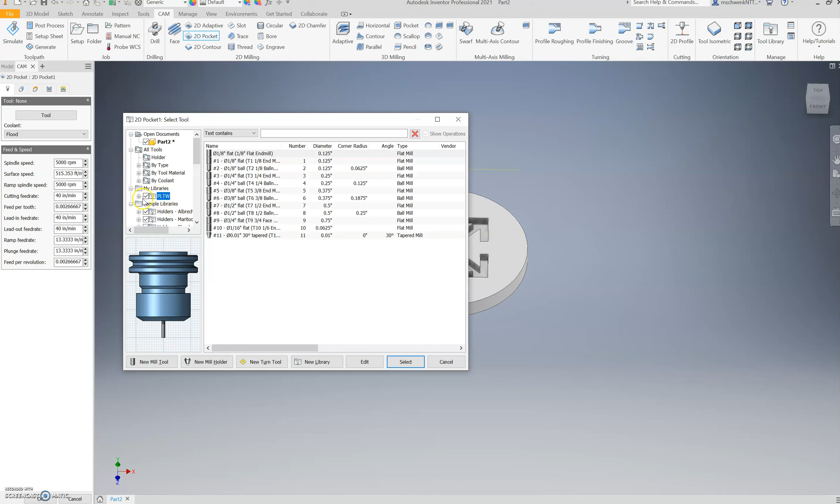So for this operation, I am going to come up to my 2D milling tab, and I'm going to select 2D pocket. And when I come through here, I get some settings where I have to input some stuff so that the machine knows what type of bit I'm using and the values I want to cut at. So I'm going to hit the tool button, and you should have a PLTW My Library, and for this one I'm going to use an 1/8 inch flat mill.

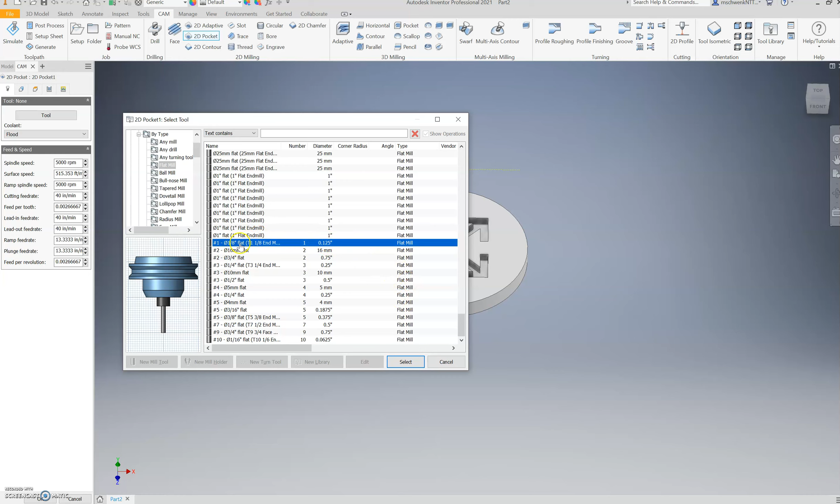If you do not have this PLTW library, you can find this by going to All Tools, and you can go by type. If you expand that, you can go with a flat mill, and then you can search it by diameter. So for an 1/8 inch, just look for one that's 0.125 inches, and you should have an 1/8 inch flat end mill. So I'm going to select that.

Now I have to set up the feeds and speeds. So this is going to be how fast the tool travels while it's cutting. And there's two values that I really want to change here. Based on the size of the bit, these values will change. You can get those from your teacher. For this one, I want to change my cutting feed rate. That's how fast the bit will be traveling through my material. For an 1/8 inch bit, I'm going to change this one to 60 inches a minute.

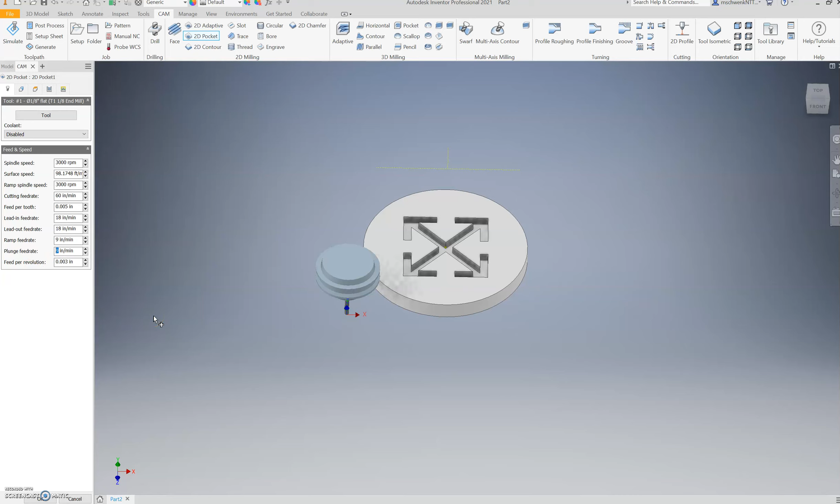And I'm going to change my plunge feed rate, which will be how fast the spindle will plunge down into my material. So I'm going to change that one to 30 inches per minute. Okay. On my next tab, it's going to ask for what geometry do I want to cut. So what pocket am I cutting here? I only have one, so I'm going to select, and I want to get the bottom edge of this pocket. Don't get the top edge. Get the bottom so that it knows how deep to go. So I'm going to click that, and I can go to my next tab then.

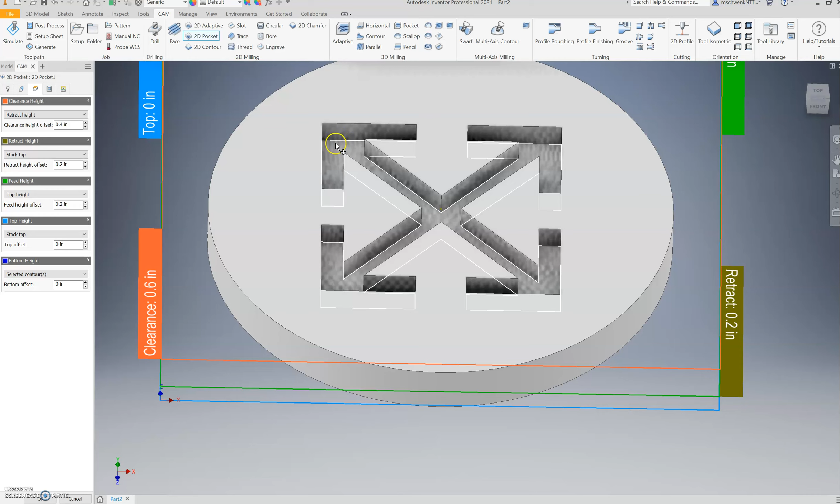Now it's talking about the heights. The ones that I'm really concerned with here are the top of the cutting height and then the bottom height. So the top height that is selected is the top of the stock, which is fine. That just means that it's the top of the piece of wood that I've placed in there for it to cut. And then the bottom height is set to selected contour, which is the bottom of my pocket that I selected. That's why I wanted to select the bottom and not the top edge. So those are good. I'm going to come over here into my passes.

Now this is going to set the behavior with what it cuts and really talks about how much material it's going to take off at once. The stuff that I want to change here is my maximum step over. Maximum step over is really the bit's overlap while it's cutting. I always want that to be half the diameter of the bit. So in this case, I'm going to go 0.0625.

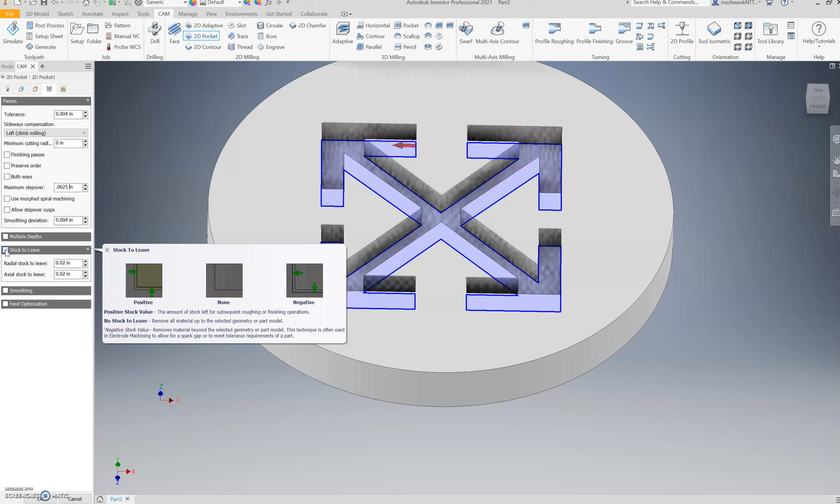And stock to leave, I'm going to leave that at 0. Stock to leave would say leave 0.02 inches there of extra material in case you wanted and needed to sand it down after it's done cutting. The material that we're using cuts very cleanly, so we don't need to leave any stock. But I do want to change and select this multiple depths. Multiple depths are how deep this bit will go before it starts doing its tool pathing.

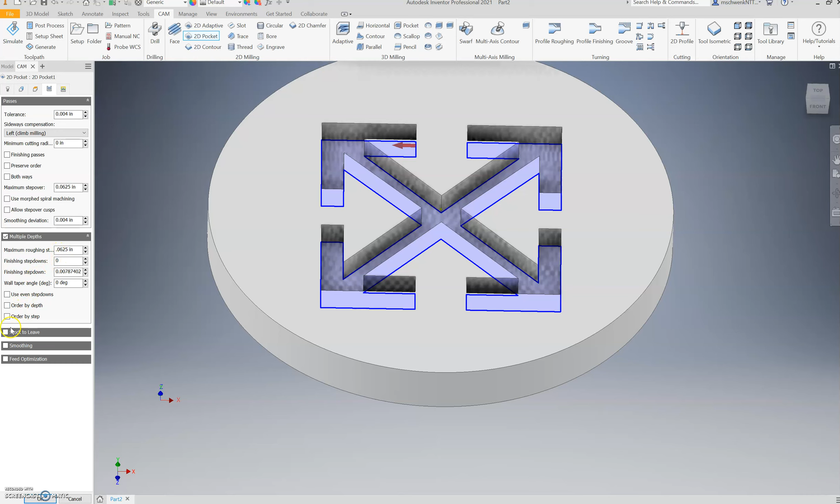So the maximum roughing depth step down that I want to go is also half the bit diameter. So in this case, it's going to be 0.0625. And I always tell it to use even step downs, which means it's going to take the total depth and divide it by 3 to do its depth, so it cuts pretty evenly. And then it's just going to make sure that none of those depths are over 0.0625. So I'm going to use even step downs.

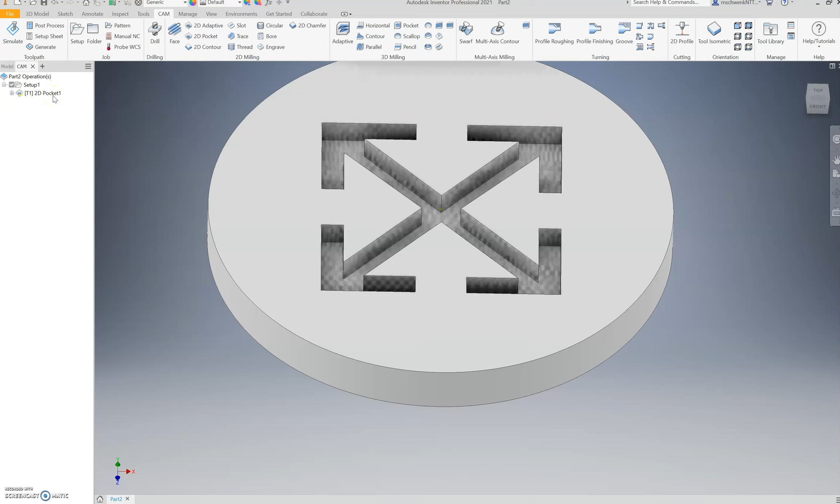For my last one here, this is how it's going to plunge itself into the wood or the other material that I'm using. The helix one is selected by default; for the material that we're using, any wood, I just go for a plunge. That means it's just going to go straight down instead of spiraling into itself. Click OK, and what you should see, if you've done it correctly, is your first operation there, and some toolpaths should appear. So here, if you look by selecting it, I have a 2D pocket that showed up, and it's showing my points. And these are the toolpaths that it will go through.

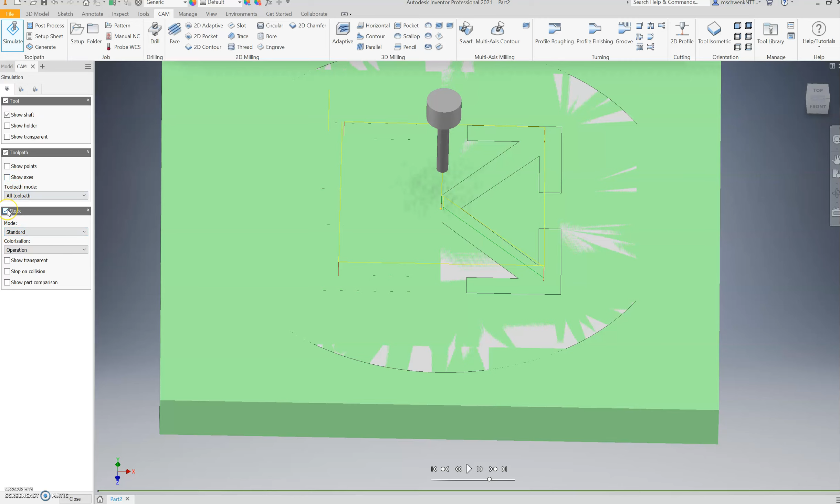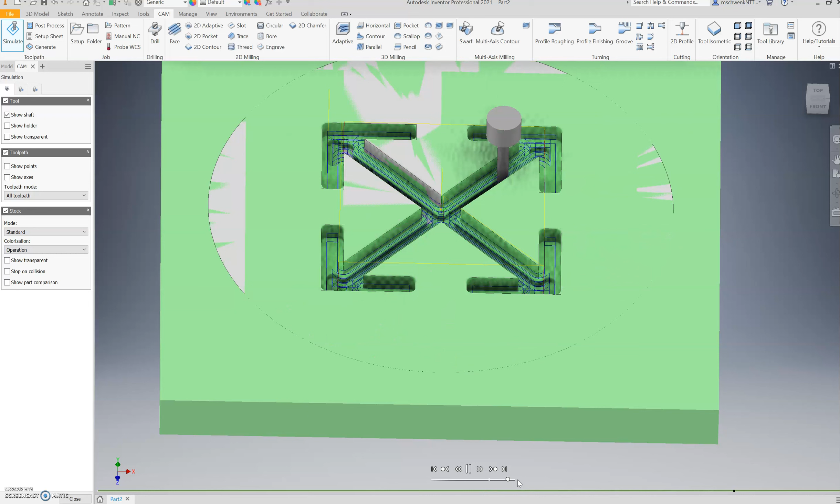If I want to hit the Simulate button, I can go to Simulate and make sure stock is selected. And I usually uncheck this Show Holder just because it makes it easier. I can come through and I can press play. And what it's going to do is walk me through the movement of the tool as it comes through and cuts my material out. So you can see it's doing everything in multiple passes. And these are the movements that the machine is going to do, and there it's finished.